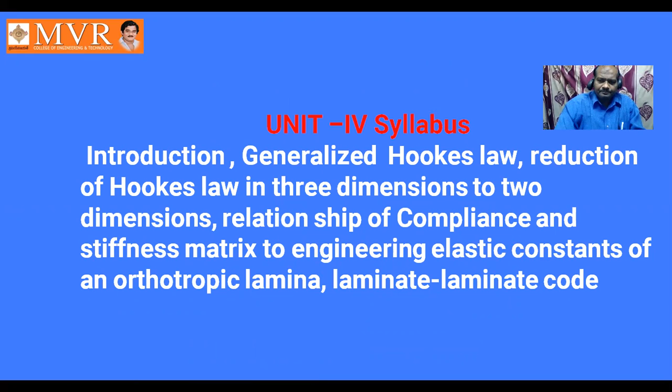If you observe the introduction, in the previous class the introduction was about what are the stresses that are going to act on a member or an object or any lamina, and then how the material is going to behave, we have studied. Symbolically it is represented. At the same time, with the help of a graph also I have explained to you to understand in a better manner.

In the previous concept, we studied Hooke's law, types of stresses, what is a lamina and what is mechanical behavior, and how the macro mechanical behavior of a lamina will be when forces act on a lamina. That is the thing I have explained and we have learned.

I repeat once again, in the previous class summary I have defined what is stress, what is strain, and how these two are related with Hooke's law. Another concept is what is a lamina and what is the macro mechanical behavior of an object.

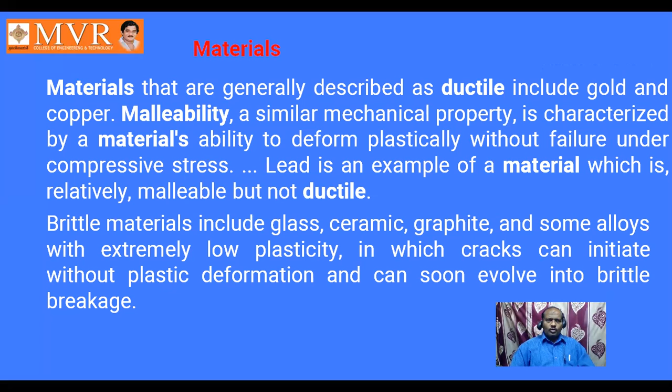Broadly, a material that can be drawn in the form of a wire has the ductility property, and a material that can be drawn in the form of a sheet has the malleability property. If you observe this example, materials generally described as ductile include gold and copper. Malleability, a similar mechanical property, is characterized by a material's ability to deform plastically without failure under compressive stresses. Plastically means it can be drawn in the form of a sheet.

Here lead is an example, if you observe, which is relatively malleable but not ductile. That means lead can be drawn in the form of sheets, but it cannot be drawn in the form of wires. That is lead. If you take gold and copper, gold wires will be there, gold sheets will be there, copper foil will be there, copper sheets will be there. So copper and gold can be used as ductile materials as well as malleable materials. That's the thing we have to observe here.

Next, brittle materials. Brittle materials include glass, ceramics, graphite, and some alloys with extremely low plasticity in which cracks can initiate without plastic deformation and can soon evolve into brittle breakage. What it means, we have given certain examples. When a load is applied on a brittle material, the material does not sag or does not elongate or does not deform by the application of load. And at the same time, it will generate cracks at the point of load.

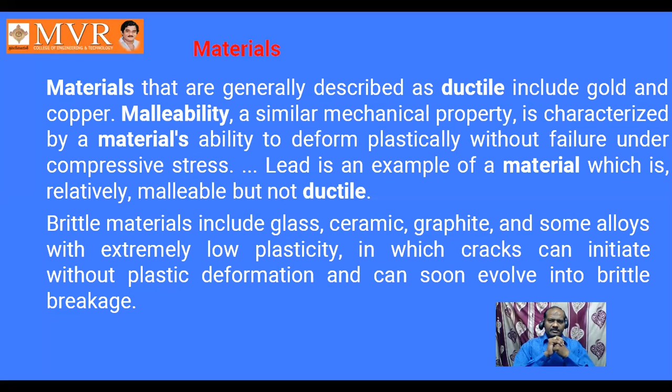For example, glass, ceramics, graphite, all these materials are of that type of nature. And if you observe cast iron, it will also behave similarly. So if a large load is applied, cast iron cannot deform or cannot sag. So this is the thing to be observed. So this is the main point from this slide. Students, we have learned what is ductile nature, what is malleable nature, what is brittle type of nature, and what are called ductile type of materials. So these are the four things we have learned from this slide.

Next, in connection with this ductility and malleability, if this expansion or deformation is calculated in terms of volume, then that can be defined with the help of the bulk modulus. So what is the bulk modulus? It is a volumetric factor to explain the expansion and deformation of a material. So I will read out the definition of bulk modulus. A bulk modulus is a constant that describes how resistant a substance is to compression. It is defined as the ratio between the pressure increase and the resulting decrease in the material volume.

So you can understand the theme behind this definition. If pressure is applied, the material results in a decrease in volume, and that is called the bulk modulus. So bulk modulus is a constant that describes how resistant a substance is to compression. That means when a metal is compressed, how far it resists is called the bulk modulus. The bulk modulus of a substance measures the substance's resistance to uniform compression. It is a property of a material that measures how much it resists when a compression force is applied.

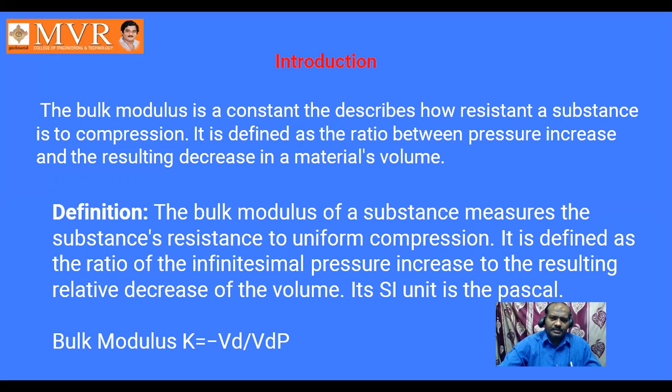So what this slide says is about the bulk modulus. How can you define the bulk modulus? How much pressure you have applied and how much it resists this decrease in volume is called the bulk modulus. It is the ratio of pressure increase to the resulting decrease in the material volume. It is one of the parameters of a material to understand the property of deformation.

Next, another property is called Young's modulus. So what is Young's modulus? It is defined as the ratio of the stress applied to the material along the longitudinal axis of the specimen and the deformation or strain measured on the same axis. So if you observe this, the material is there. On this metal, stress is applied along the longitudinal member like this. Then it is going to be expanded. That means strain, a change in dimension, takes place. How much change takes place is the measure for defining Young's modulus.

So Young's modulus is also called by other synonyms: tensile modulus, elastic modulus, or modulus of elasticity. So Young's modulus is also known as the tensile modulus, elastic modulus, and the modulus of elasticity.

So when we apply the force on a material in a longitudinal direction, we are applying the stress. With that stress, how much it is expanding, we have to calculate. By that, we are able to calculate Young's modulus. It is denoted by the letter E.

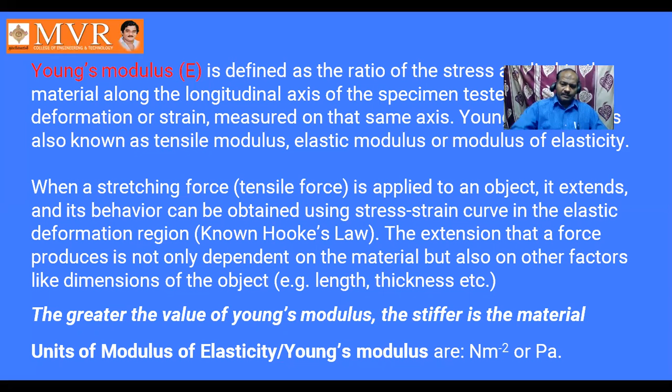Now stress and strain. I already explained a little part of the stress. Stress is equal to force by area. What is the meaning of force by area? If a large area is there and a small force is applied, the stress is going to be very low. If a small area is there and the same force is applied, then stress is going to be very high. So it depends upon the force and the area. Stress is equal to force by cross-sectional area, that is P by A.

So what is stress? When a body is subjected to external forces, equal and opposite forces are developed at the various sections of the body. This resisting force is known as stress. Stress is written by the Greek letter sigma. In the SI system, it is Pascal. 1 Pascal is equal to 1 Newton per square meter. In practical calculation, if stress is very high, the unit can be written as megapascal or gigapascal. So this is about stress.

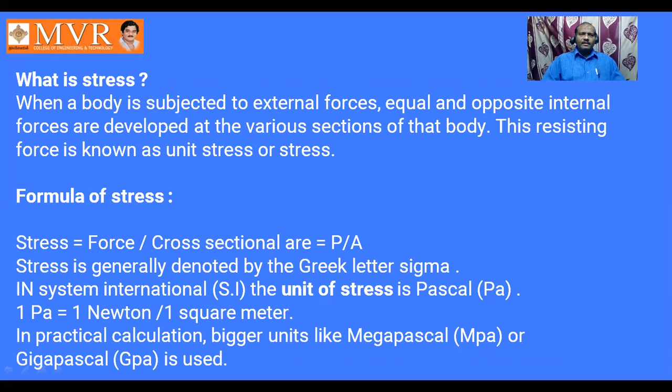Next, strain. Change in length by original length is called strain. When an object is externally loaded, due to that load, the metal tries to deform. If the deformation is in one direction only, it relates to the Young's modulus of the material. If the deformation is volumetric, throughout the object, we call it bulk modulus. If Young's modulus is high, the stiffness of the metal is very high. If Young's modulus is low, the stiffness of the metal is low.

Similarly, for bulk modulus, how can we explain? While applying the load, meaning when a pressure is applied, the deformation is very small. That means the reduction is small, so we can expect the bulk modulus to be very high. For the same application of the load, if the deformation of the surface is throughout, then more deformation means less bulk modulus. Less deformation means more bulk modulus. So like this, you can remember Young's modulus and bulk modulus.

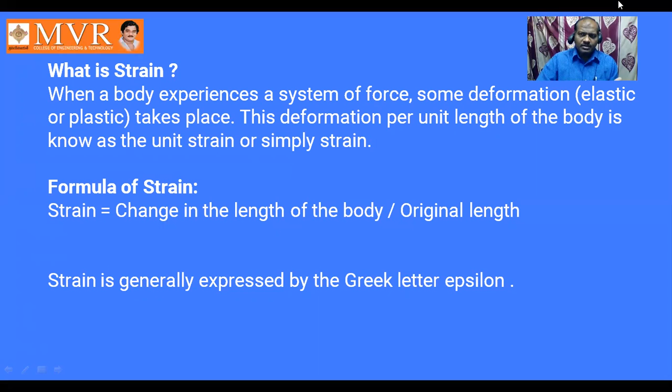So this is how we can explain the stress strain concept with the ductile material and brittle material. At the same time, the same concept can be explained for the Young's modulus and the bulk modulus. Next, what are the applications of this elastic modulus or bulk modulus?

Elastic modulus is an important mechanical property for material selection. For material selection, Young's modulus is one of the important factors. Why? Because you have to consider expansion and thickness also. Along with that, we can go for product design and performance analysis in several engineering as well as medical applications. So in engineering applications as well as medical applications, Young's modulus is considered.

And at the same time, for a material, we analyze its function. Then also, an important property is Young's modulus. That is, to test the performance of a material, we consider elastic modulus as one of the properties. Next one. What are the things we can use? These are used for selection of materials for various purposes, considering how it will react under different types of forces, to aid the design process, to reduce material cost, and to determine batch quality and consistency in manufacturing.

So this elastic modulus is a metal behavior or property. It counts also what type of material, and at the same time how much it is going to reduce the cost if you use this material, and the quality of the material, and consistency in the manufacturing process. The product quality also depends upon the material nature. In this material nature, elastic modulus plays a prominent role.

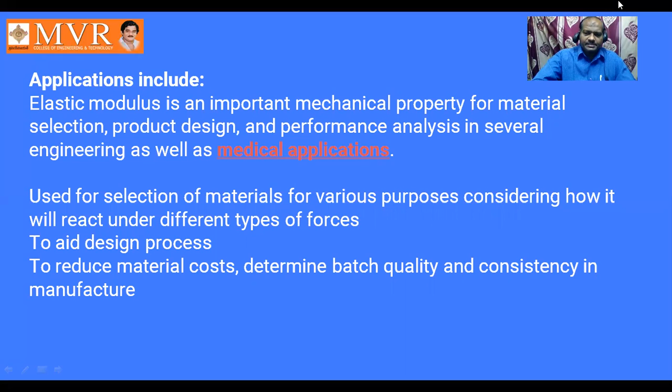Next, what are the factors affecting this elastic modulus? The modulus is correlated to the binding energies of the atoms. The binding forces and the modulus of elasticity are typically higher for high melting point materials. Young's modulus is also called the modulus of elasticity. So a higher modulus of elasticity means it has a higher melting point. At the same time, Young's modulus also depends upon the orientation of the atoms and molecules.

For example, take a pen. If molecules are orderly arranged in one direction only, in the same direction we can separate the material. That means it can break like this. A material can resist in one direction to a large extent, and the same material can be broken into pieces in another direction. Why? Because it purely depends upon the orientation of the molecules. So the factors affecting elastic modulus are the orientation of the molecules and the melting point of the material.

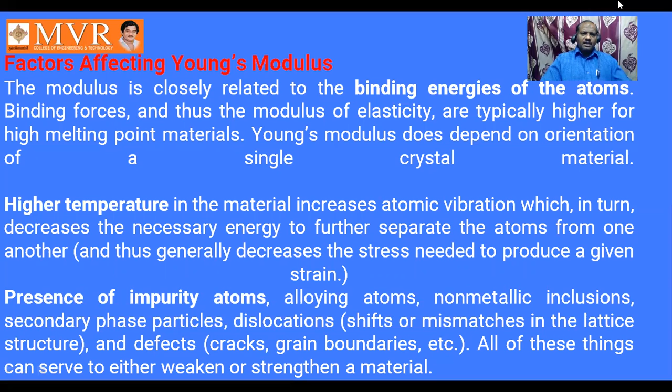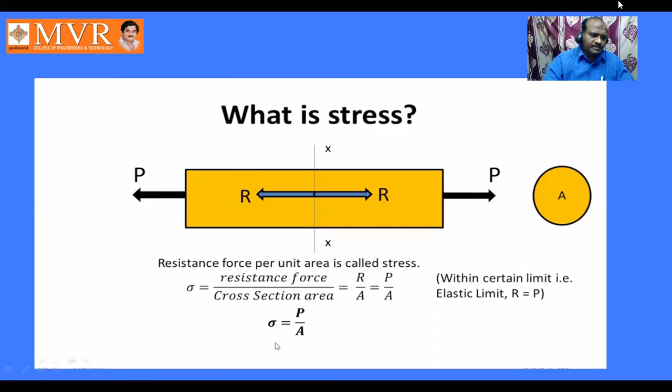So if you observe, this is the stress symbol. Two P's are applied on a yellow object, and these are opposite to each other. That is the thing to understand here. This is called tensile stress, and another one is called compressive stress. Tensile stress means the forces are opposite to each other, away from each other. In compressive forces, the two are acting against each other. Stress is represented by the letter sigma.

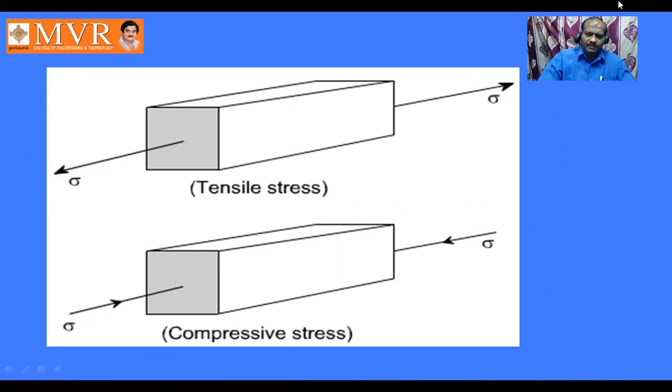If you observe this behavior of a material, I already have explained this one, stress versus strain. A, B, C, D are the points we have mentioned. At point A, if you remove the load, the material does not change its shape or size. At point B, if you remove it also, the same thing happens. Up to B from A is called elastic behavior. That means even after adding load a number of times, it does not lose its nature.

At C, after B, if you apply load again, it reaches C. And if you remove the load, there is a small change in the orientation or dimensions of the object. That point is called the yielding point. Beyond the yielding point, if you apply the load, that leads to the plastic behavior of a material. What is the plastic behavior?

After C, even if you remove the load, the material tries to expand up to D. At the D point, if you remove the load, it will try to expand continuously, come to E and fail. This type of failure is called ductile failure. For ductile materials, this type of failure will happen. For brittle materials, it fails at the ultimate load only. That is what we can observe from this graph.

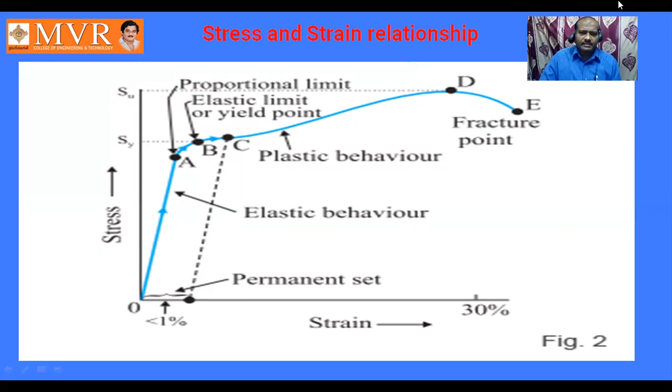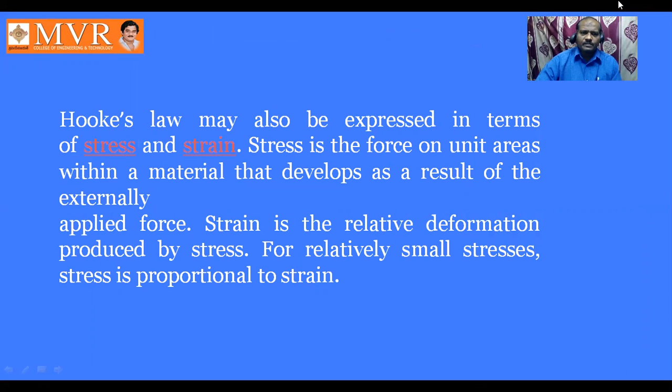So Hooke's law says stress is directly proportional to strain. Stress is the force per unit area in the material that develops as a result of the externally applied force. Strain is the relative deformation produced by stresses. For relatively small stresses, stress is proportional to strain. Hooke's law, this equation I have explained in the previous one: F is equal to minus kx. In this equation, F is the force, x is the extension length, k is the constant of proportionality known as the spring constant, in Newton per meter.

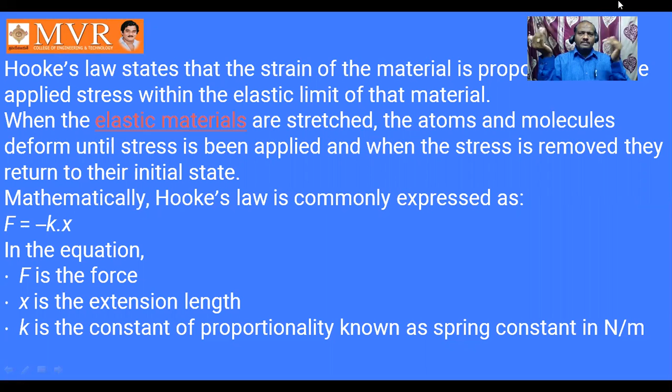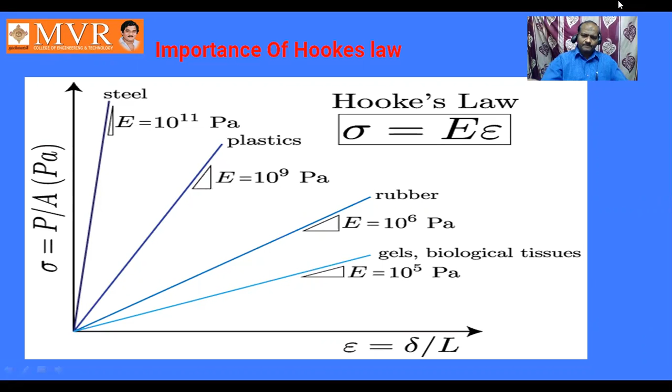If you observe this graph, steel has a high modulus of elasticity compared to biological tissues, rubber or plastic. So sigma is equal to E times epsilon. Epsilon means strain. Sigma means stress. Capital E means Young's modulus of material, or modulus of elasticity, or elastic modulus. Those are the synonyms for this one.